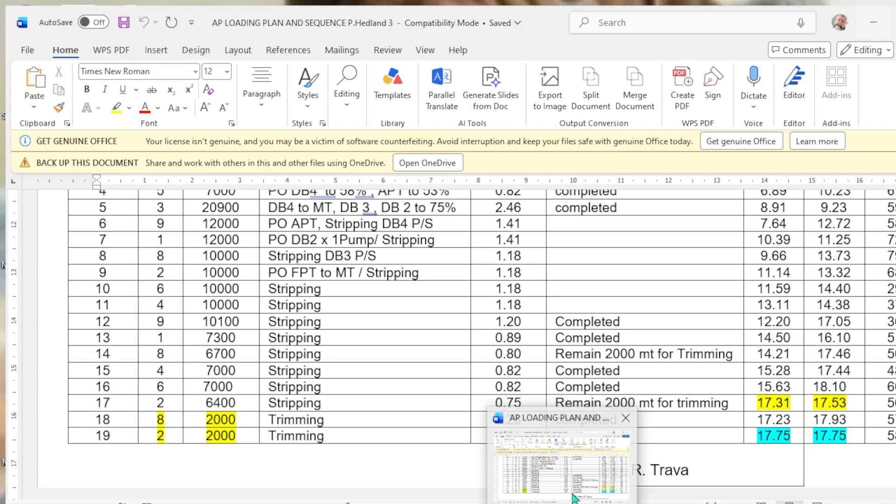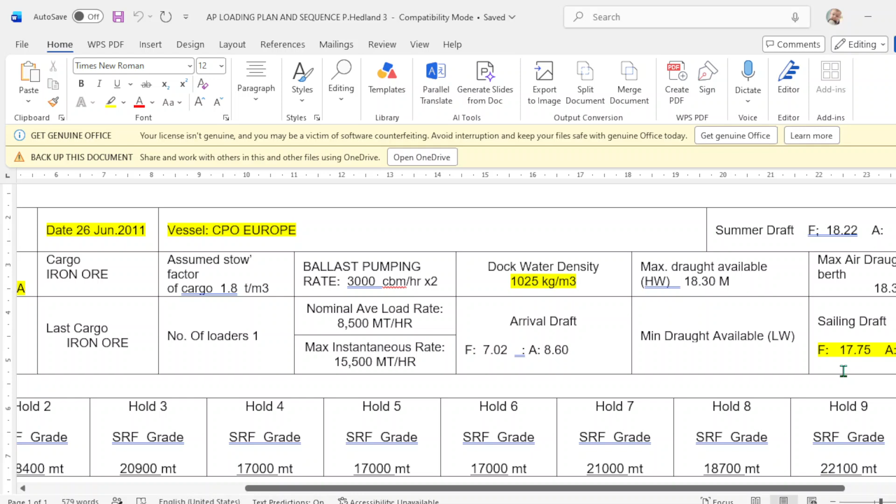This is the loading sequence, and the date the vessel is loading at Port Hedland is 26 June 2011. So that is 15 years ago. Okay, 15 years ago. And the cargo is iron ore and to be discharged in Qingdao, China. The density at berth is 1.025, which is seawater, and the departure draft is 17.75 even keel.

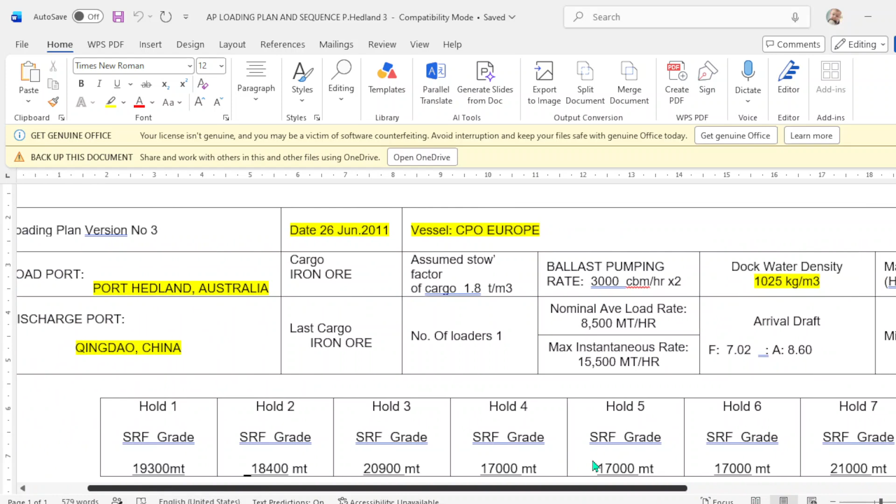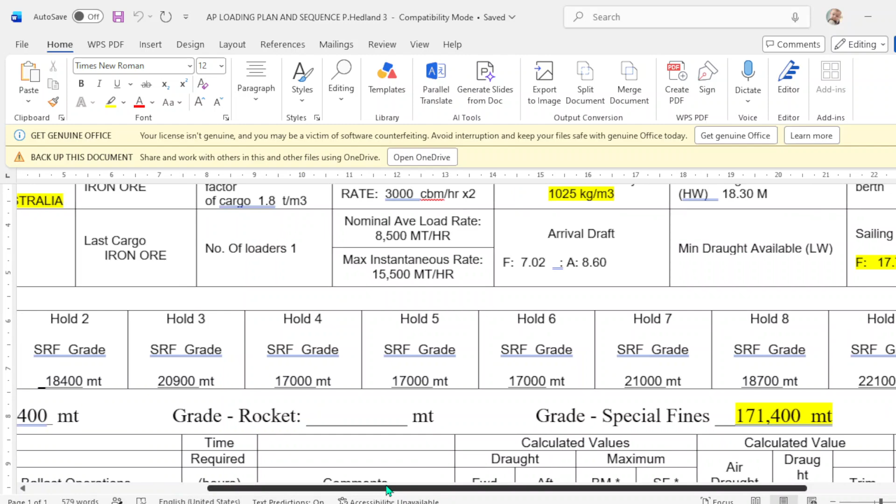Okay, and this is now the cargo for each hold. Number one is 19,300. Number two is 18,400. Number three is 20,900. Four is 17,000. Number five is 17,000. Number six is 17,000. Seven is 21,000, and eight 18,700, and nine is 22,100. Okay, the grade of the iron ore is SRF grade. Okay, SRF grade.

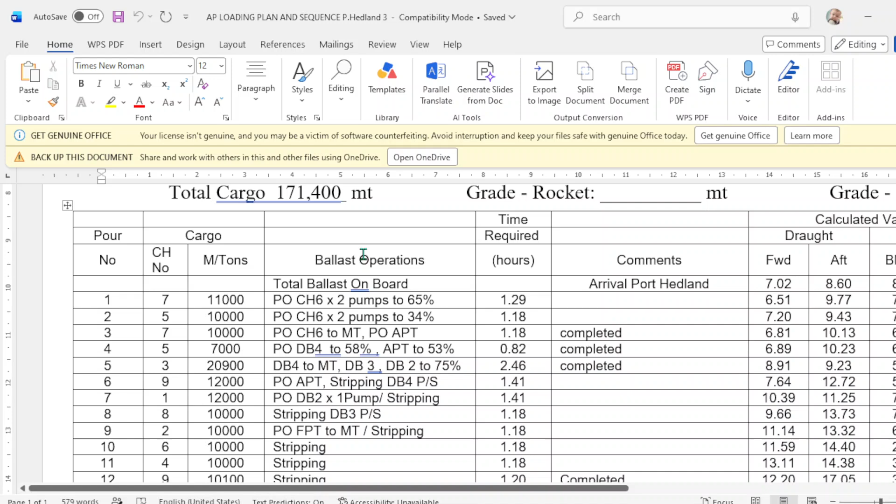And this is now the loading sequence. We have here the number of pour, from pour number 1 to pour number 19. And this is the cargo holds from 1 to 9, and this is the sequence of loading and the cargo for each hold to be loaded. Let's say pour number 1 is hold number 7, then you have to load 11,000. Pour number 2 and hold number 5 is 10,000. And pour number 3 is hold number 7. The second sequence of loading is 10,000, and so forth.

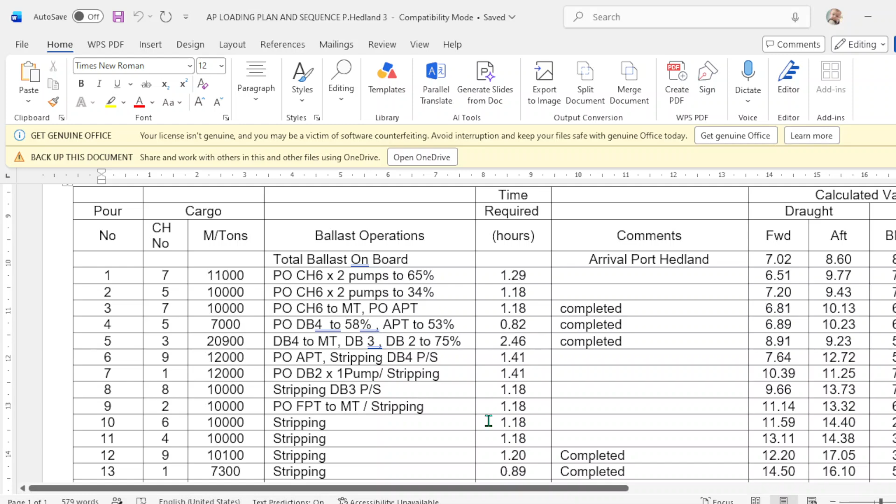This is the ballast operation and number of hours of ballast operation. Okay. Then over here is the draft for each pour. Forward and aft draft, then the bending moment, shearing force, and the air draft. And you have here the mid draft and the air draft for hold number 1, 5, and 9, and trim.

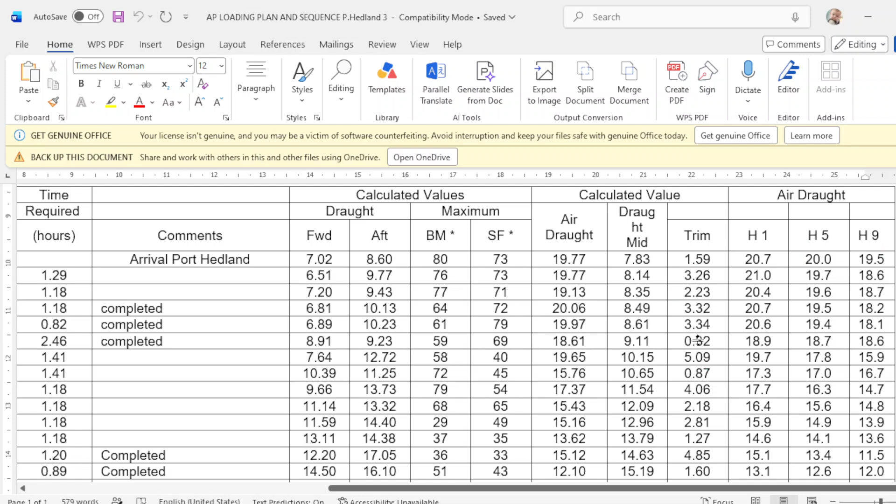Okay, so let's say that the operations are started from pour number 1, and the chief officer, according to his night order or instructions to the duty officers, when reaching pour number 17 in hold number 2, after he has completed loading 6,400, he will advise the foreman to stop loading and ask the draft surveyor and the chief officer to make a draft reading around the vessel to compute for the cargo remaining to load for trimming.

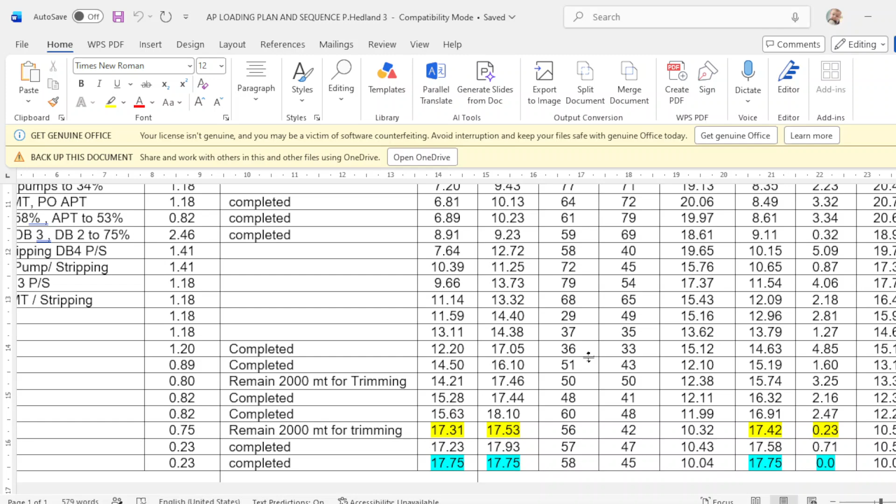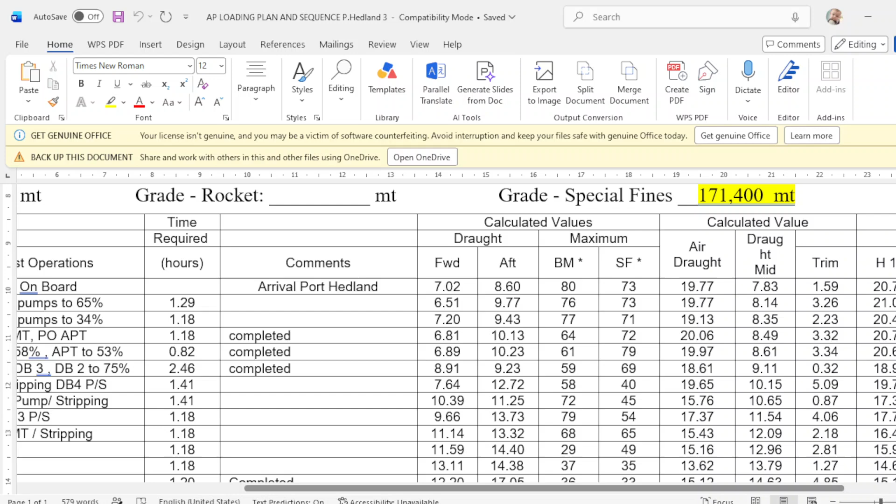Okay, so once the operation has stopped, the chief officer and the draft surveyor would go down the vessel and take a draft reading around the vessel, forward and aft, mid draft, port and starboard. As soon as they have completed reading the draft, they would agree what the draft they have read is. So, for example, they both agreed that the forward draft is 17.31 and the aft draft is 17.53 and the mean draft is 17.42 and the trim is 0.23. So that is now their draft reading.

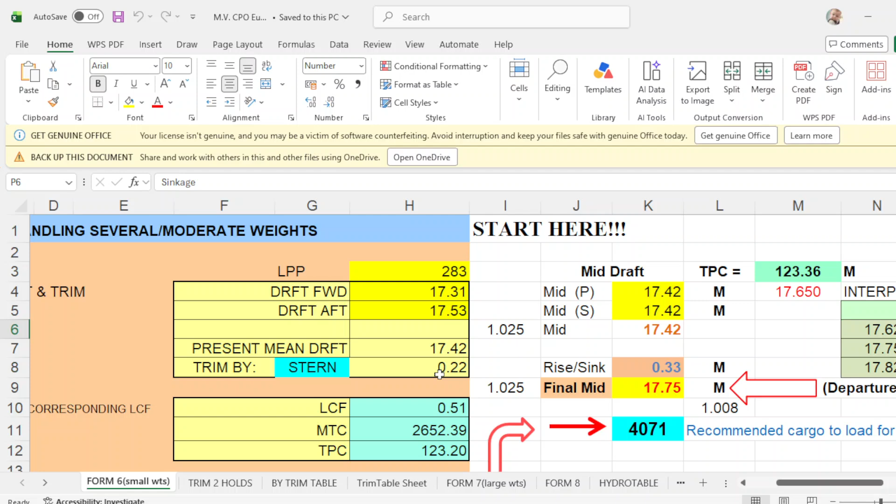Once you have this draft reading, now you can use your program for trimming. So I have here a program for trimming for CPO Europe. And this one, which I call the Form 6 small weights, or how to find trim when handling several moderate weights. So this is the LPP of the vessel, and according to the draft reading of the chief officer and the draft surveyor, draft forward is 17.31. Here, 17.31.

And aft draft is 17.53. Okay, 17.53. Take note that it will automatically compute for the mean draft and the trim. So mean draft is 17.42 and the trim is 23. But the program says 22. Anyway, according to their draft reading, actual mid draft port side is 17.42. And starboard actual mid draft is 17.42. Meaning no list. Okay?

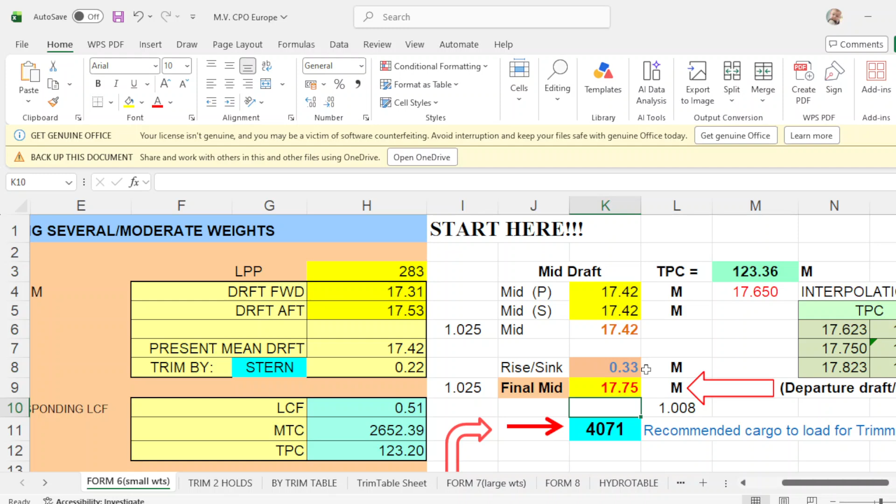And your departure draft even keel is 17.75. Put here 17.75. There you go. Once you put your departure draft, it will compute for the sinkage, which is 0.33 meters or 33 centimeters. So how do you get this one? Your final mid draft is 17.75 minus your mid draft of 17.42. That will be 33 centimeters or 0.33 meters. Okay. There's another way of computing this sinkage.

First, with this sinkage, you convert this to cargo, which is your recommended cargo to load for trimming. So how did I get this amount? You click this cell, then you will see the formula. Okay, formula.

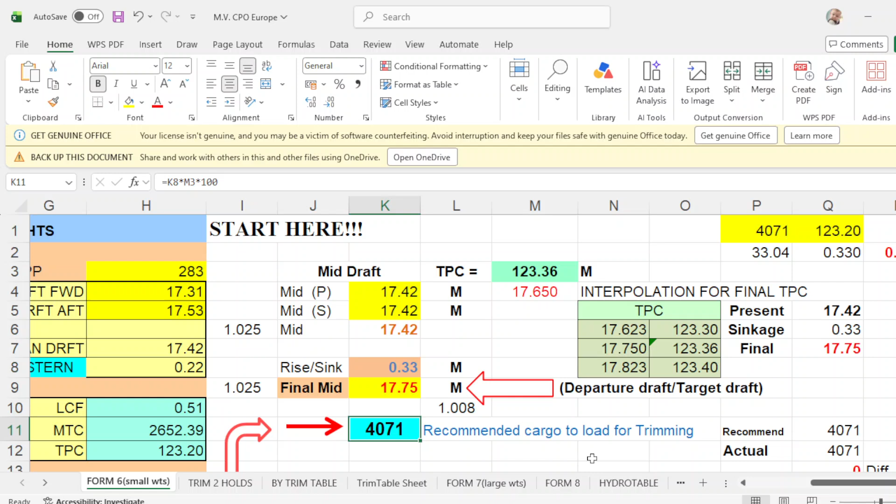So formula says K8, which is K, and row 8, which is your sinkage, times M3, M, row 3, which is your TPC, times 100. Meaning your sinkage times your TPC times 100 is 4071. That is how you will find your recommended cargo for loading. Okay.

Once you already know your departure draft or your final mid draft, you interpolate the TPC of your departure draft of 17.75. So you interpolate the TPC and your TPC would be 123.36, which is this one. Okay? Let's take out this one. Okay? So this will be your interpolated final TPC.

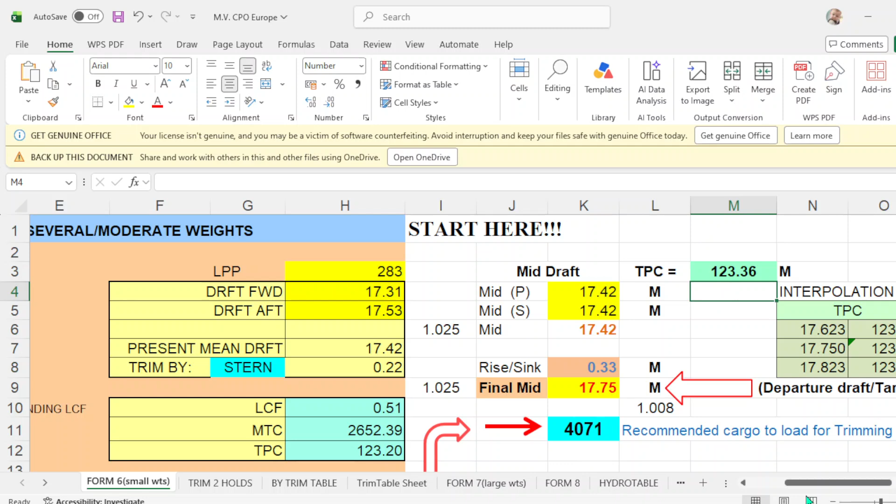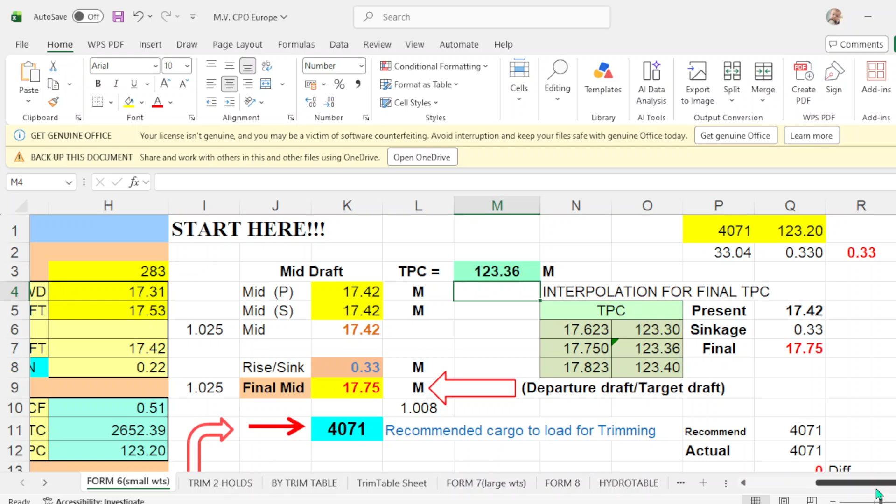Now, there's another way of computing the sinkage. Your recommended cargo total for trimming is 4071. Just place it here. Then you have your TPC from your initial draft forward and aft. So your TPC is 123.20, which is this one. So your recommended cargo total for trimming divided by your TPC 123.20, that will be 33.04. Divide by 100, that will be sinkage will be 0.33.

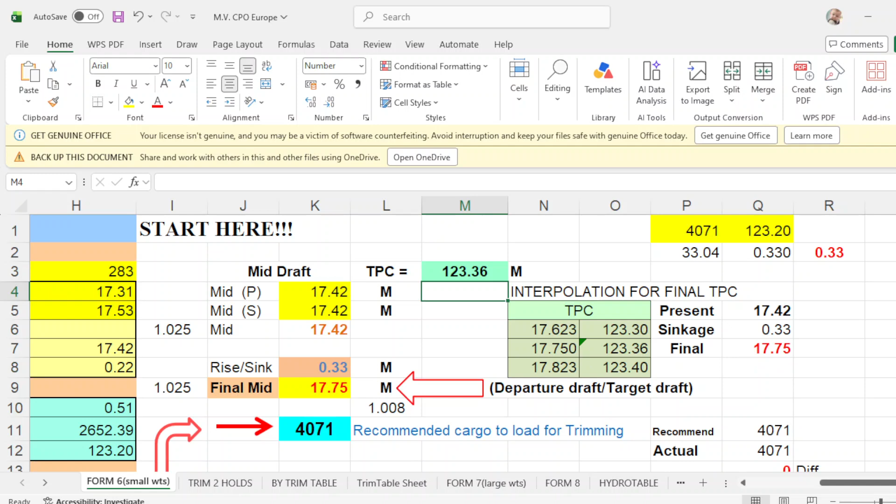So your present draft, mid draft of 17.42 plus your sinkage of 0.33, your final departure draft is 17.75, which is exactly the same with this one. Okay? There's another way of finding the sinkage. That will be weight divided by TPC divided by 100, then you will have 0.33 meters of your sinkage. Okay.

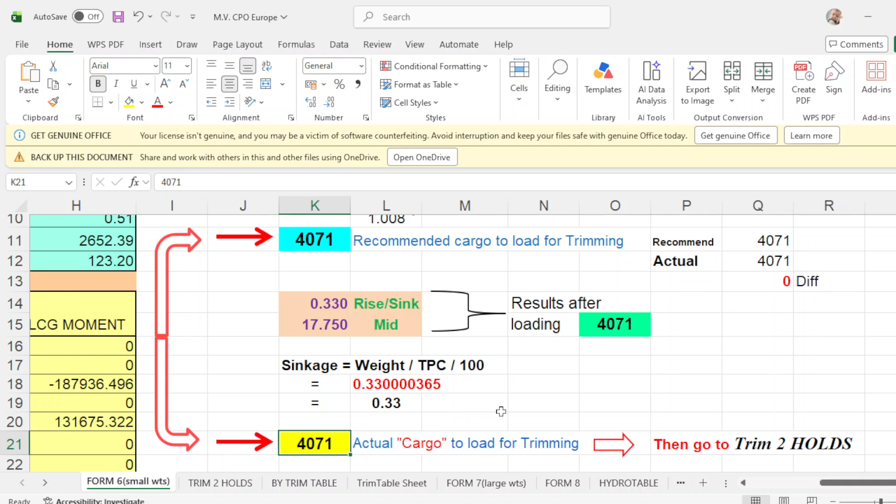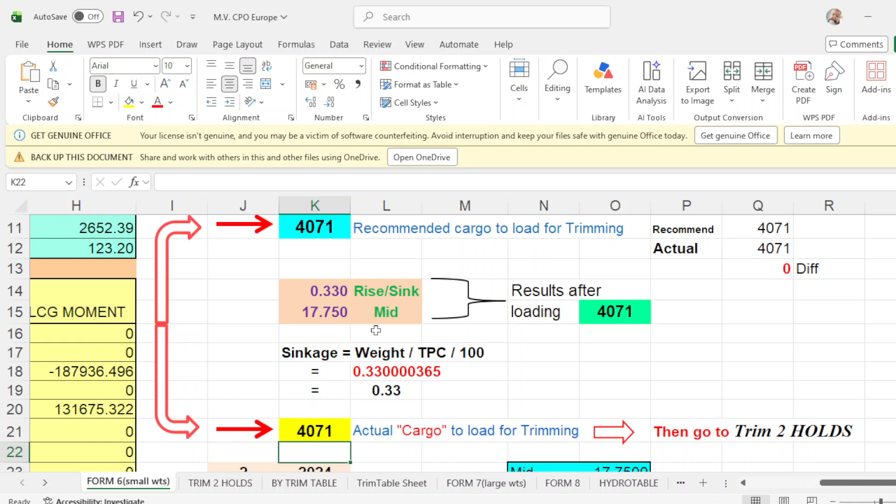Now, you have already your recommended cargo to load for trimming. So you follow this arrow, then put here your remaining cargo to load for trimming. So put here 4071. Once you loaded 4071, results after loading, then your mid draft will be 17.75, which is exactly the same with your departure draft, and your sinkage is also the same with this sinkage. So this is to prove that your figure is right.

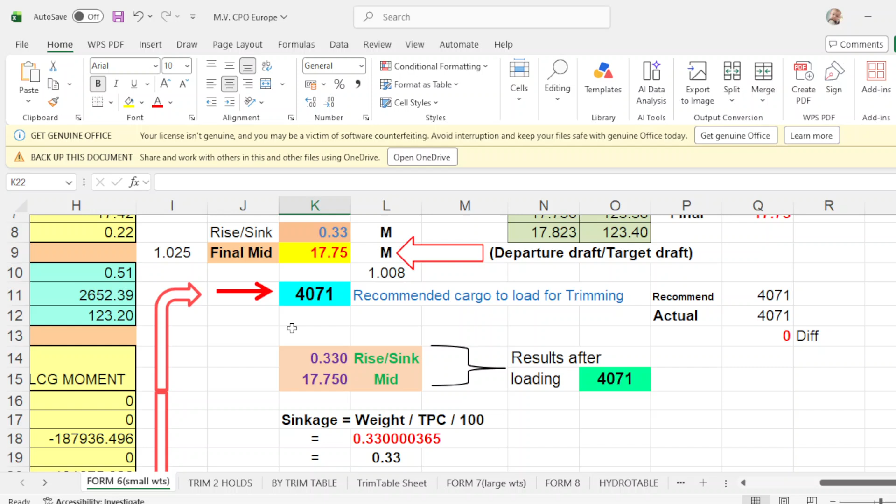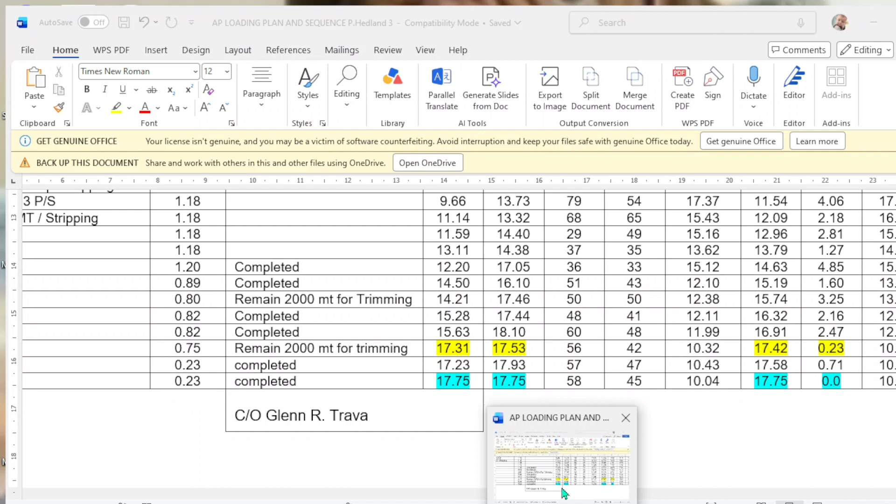Now, it says here, this is the actual cargo to load for trimming, then it says go to trim 2 holds. So you go to trim 2 holds. It says here trimming with 2 holds, and take note of the remaining cargo to load is 4071. Your trimming holds are 8 and 2 according to your plan. And your initial draft forward is 17.31, aft draft is 17.53, mean draft is 17.42, your trim is 22. This is your MTC, LCF, and TPC.

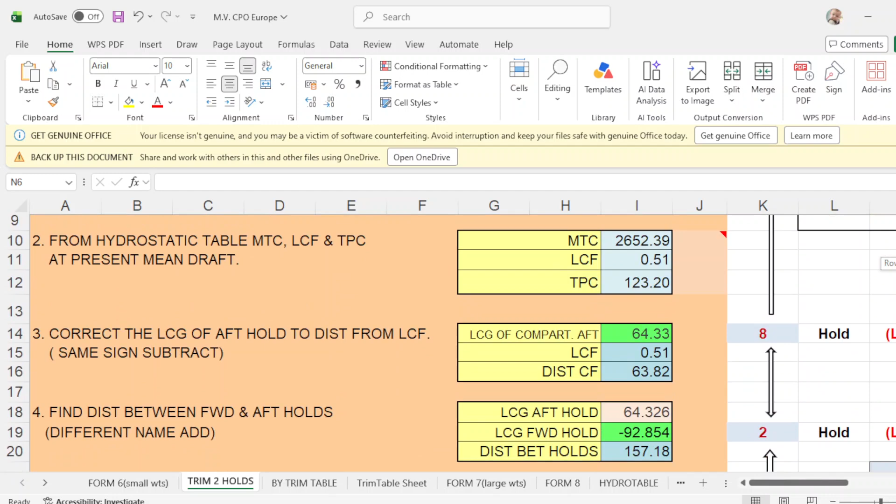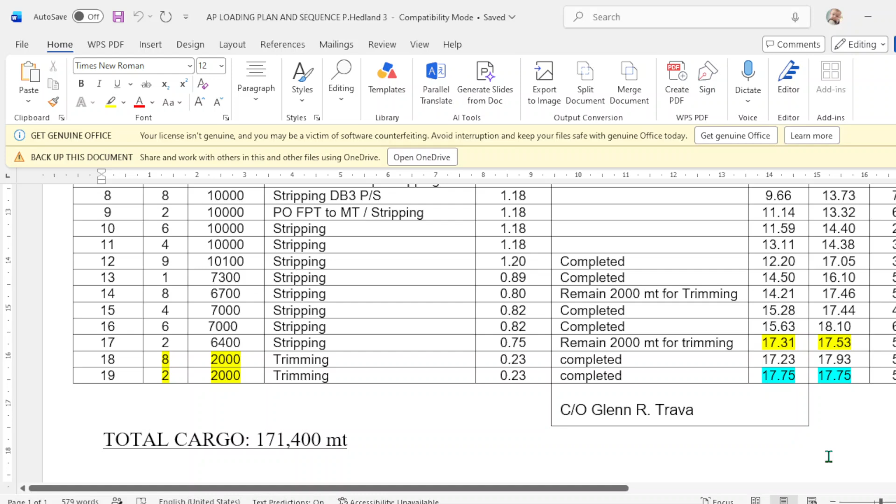Okay? So you now scroll down and take note, it is asking for your final trim. Since according to your plan the vessel is even keel, your trim is 0. Here, your trim should be 0. So put here 0, the final trim, because of even keel. Then it will tell you what to load in cargo holds 8 and 2.

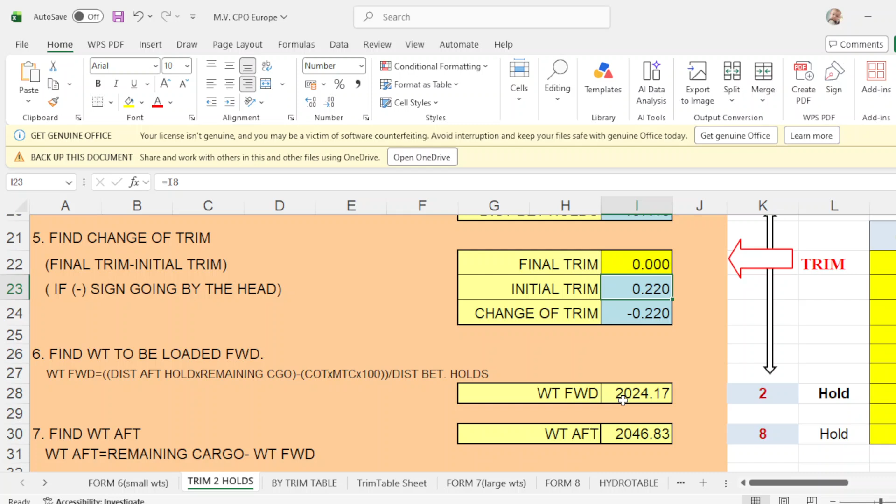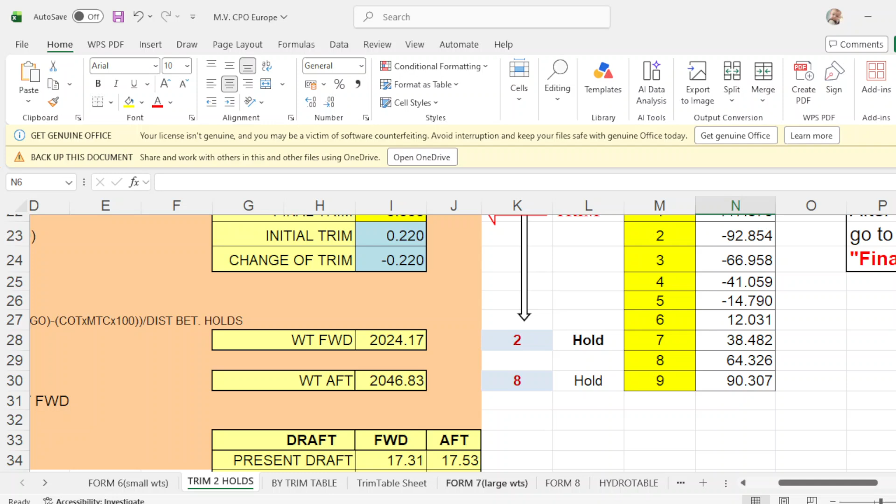So in cargo hold number 2, for your forward hold, you have to load 2024. So in number 2, you write 2024. And number 8 should be 2047. And you have here 2047 if you run it up, and it will give you the final departure of even keel. Forward is 17.75, aft draft is 17.75, your trim is 0, and your mean draft is 17.75.

Your deflection is 0. So your mid draft, how do you get your mid draft? So this equals, go to form number 6. This is your mid draft. Click this one, press enter. That will be your mid draft, put equals here, and this is your mid draft, and your deflection is 0. Okay, so this is program number 1, program number 2, and program number 3 by trim table.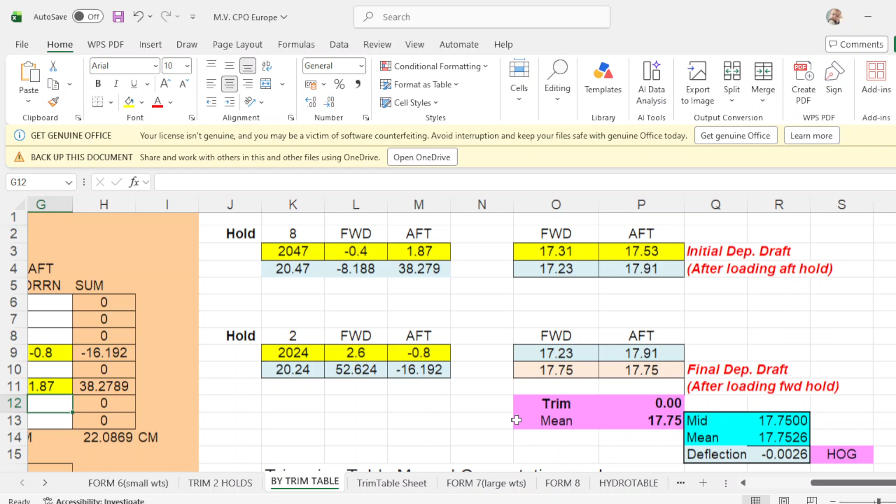Trim table, take note of the remaining cargo to load is 4071, and your initial draft forward is 17.31, aft draft is 17.53, your mean draft is 17.42, your mid is 17.42, and your trim is 0.22. Okay, so your trimming holds are 2 and 8, and your cargo to load in hold number 2 is 2024, and 8 is 2047. Consult your loading manual and look for the forward and aft correction of hold number 2, and hold number 8.

So I have here a table sheet for trim correction. So this is the name of the vessel, this is the name of the cargo hold, this is the draft 2, 4, 6, 8, 10, 12, 14, 16, 18, and 20. This is the forward correction and aft correction. Since our departure draft is 17.75, the nearest draft would be 18. So I click here 18. Our trimming hold is hold number 8, forward and aft. So I made highlight here.

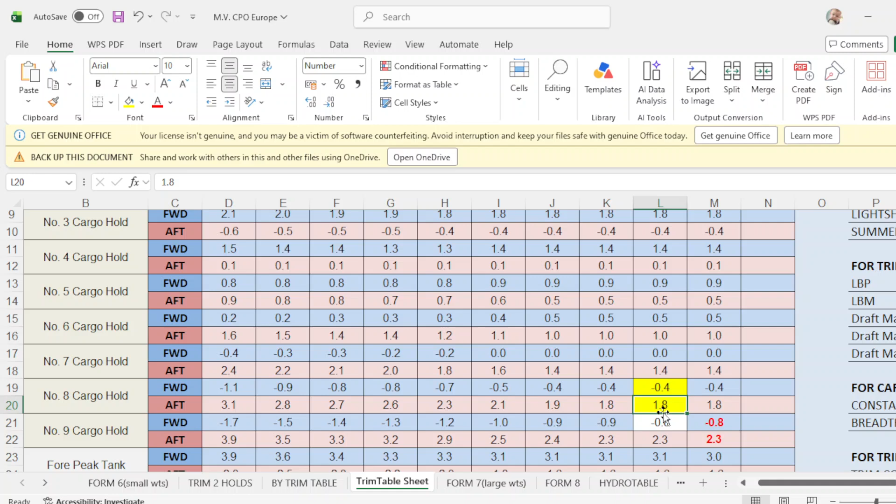So forward is negative 0.4, negative 0.4. There you are, and aft draft is how much? Aft draft is positive 1.8. Positive 1.8.

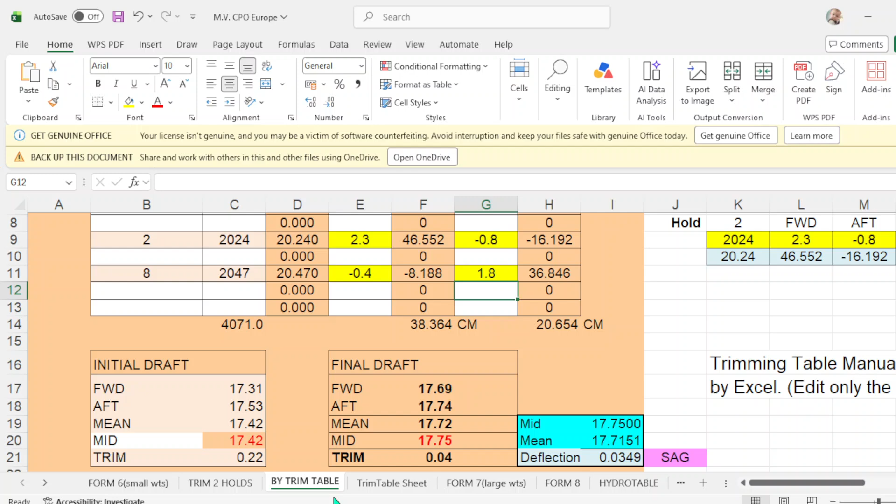Okay. Take note of your departure draft. So forward is 17.69, aft draft is 17.74. Short from your departure draft of 17.75. Okay. Now take note that in hold number 2, in forward correction from draft 10 meters up to 20 meters, they have the same figure correction of 2.3. So these are all assumptions. So they cannot pinpoint which point somewhere in the vessel would give the precise number of correction at a certain point.

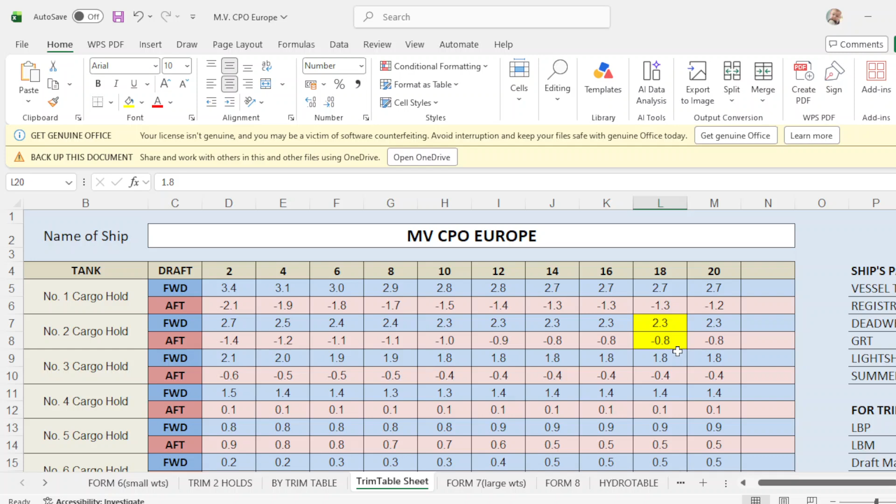So with your aft correction, and the same thing with hold number 8. So these are all assumptions. So what we do, since your draft is less than your departure draft of 17.75, we will adjust the forward correction. See, forward correction, we will adjust. So make this 2.4, okay, increase the number to 2.4, then it is now 17.71, but it's still short, so make this 2.5, increasing a little more, 2.6. Now you have 17.75.

Now you have to adjust your aft draft, but take note of your trim by the head, so you have to adjust your aft. So make this 1.9, for example. Too much, so you have to reduce. What will be this, 1.89? So 85. Now even keel, okay? So this is a little bigger, we make this 1.88 of your deflection. Deflection, your mean draft.

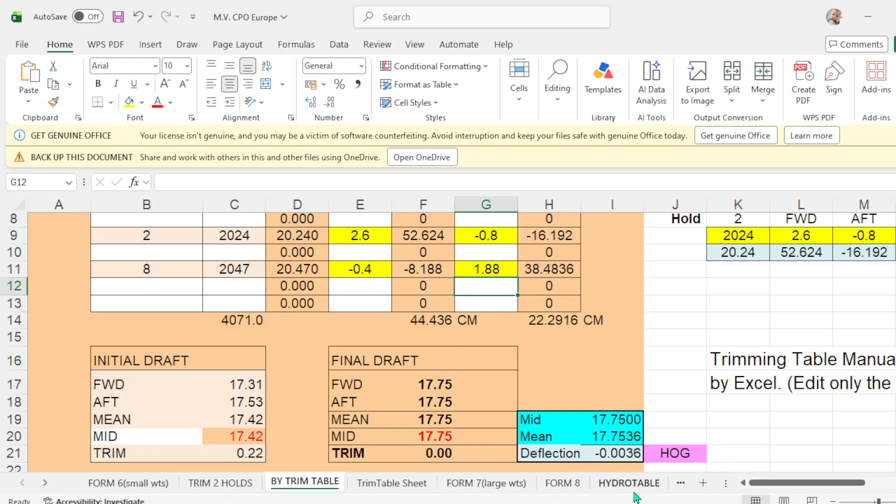So to reduce the deflection, make it 8. Now it's 36. I think that's okay. So you are now even keel at 17.75 forward, aft, mean, and mid. So your trim is 0 and your deflection is 0. Okay. Now we go here.

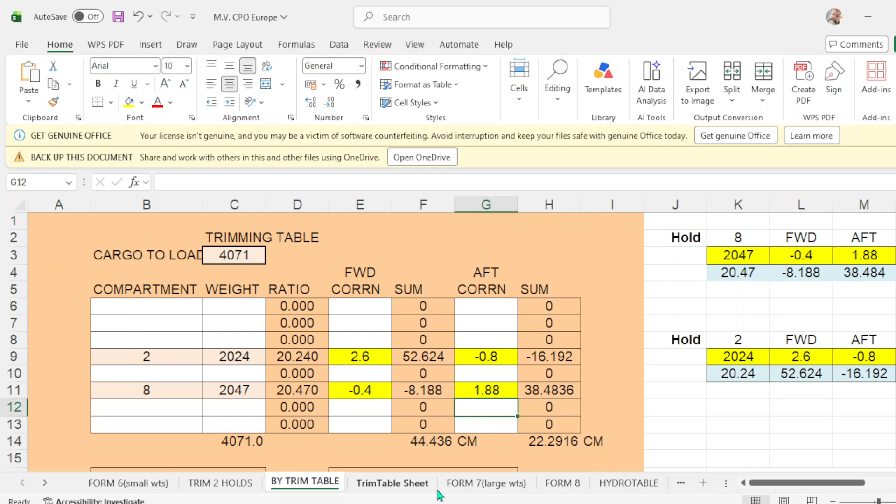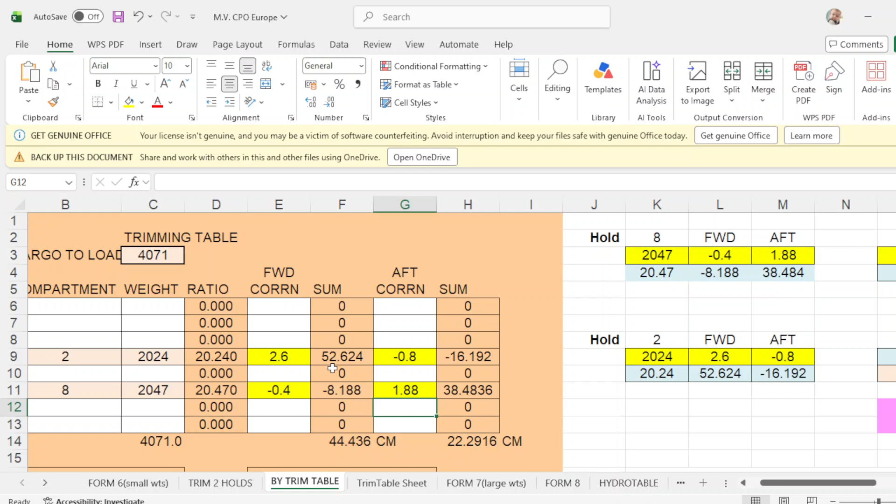If we try to load in hold number 2 the 2024 first, then we will be trimmed by the head, which is not good for stripping. So I suggest that we must load first in hold number 8 to have a good trim by the stern. Take note, number 8, the weight is 2047, forward correction is negative 0.4, and aft correction is 1.88. In hold number 2, the weight is 2024, the forward correction is 2.6, and aft correction is negative 0.8. Okay? And this is the initial draft of forward 17.31, aft is 17.53.

So after loading 2047 in hold number 8, your new draft will be 17.23 forward, and aft will be 17.91. So carry this down, then now you have to load in hold number 2. Hold number 2, you load 2024. After loading 2024, your draft will be forward 17.75, aft draft 17.75, and your deflection is 0. Your trim is 0 and your mean draft is 17.75.

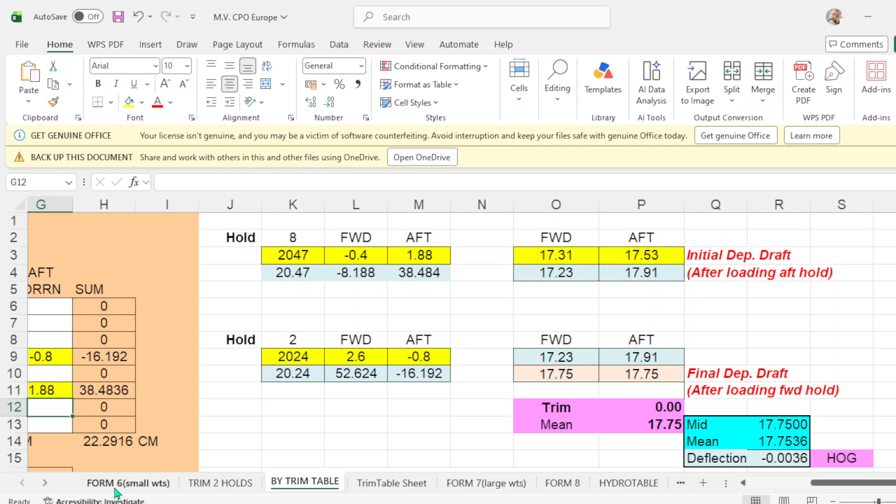So you have 3 programs now, which are by trim table, trim 2 holds, and form number 6. And the last program to back you up is form number 7. So form number 7 is how to find draft and trim when handling weights involving large changes in draft. Okay? Take note the density at berth is 1.025. So density is 1.025 and the draft forward is 17.31, and aft draft is 17.53, and your mean draft is 17.42 and your trim is 0.22.

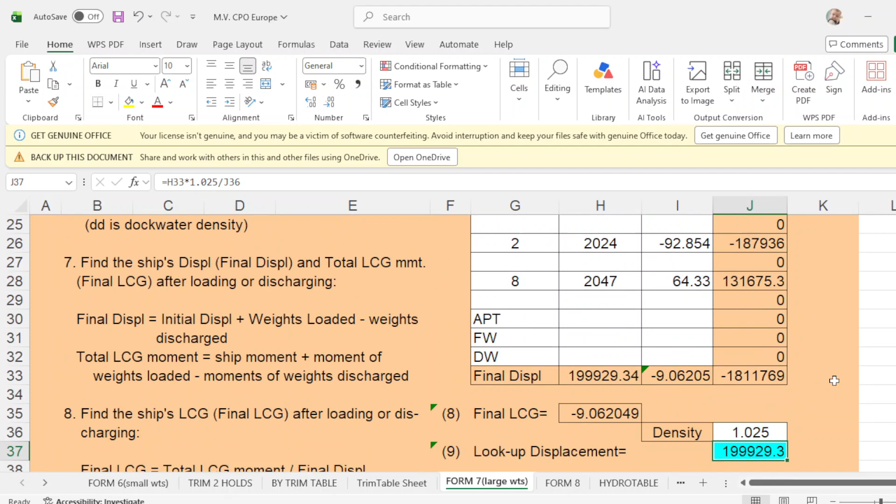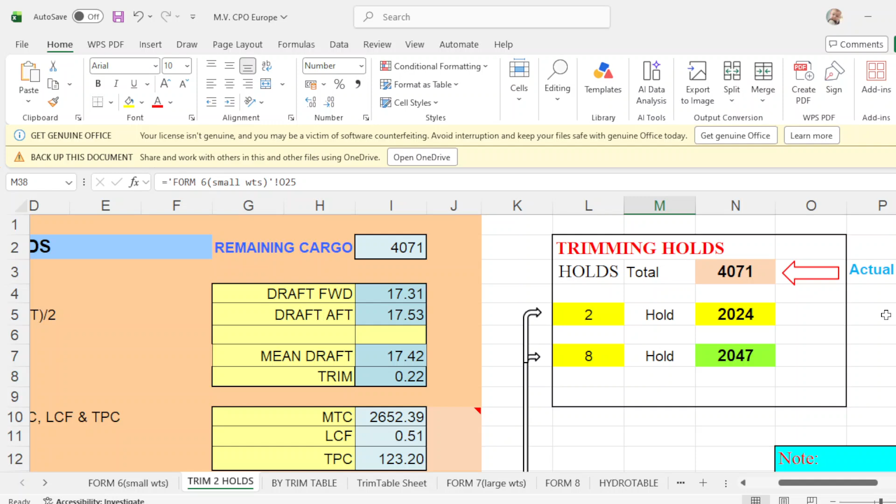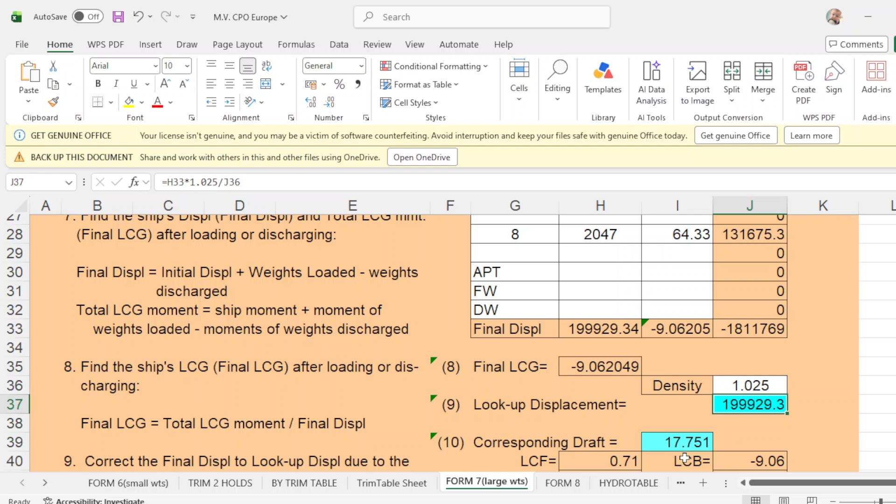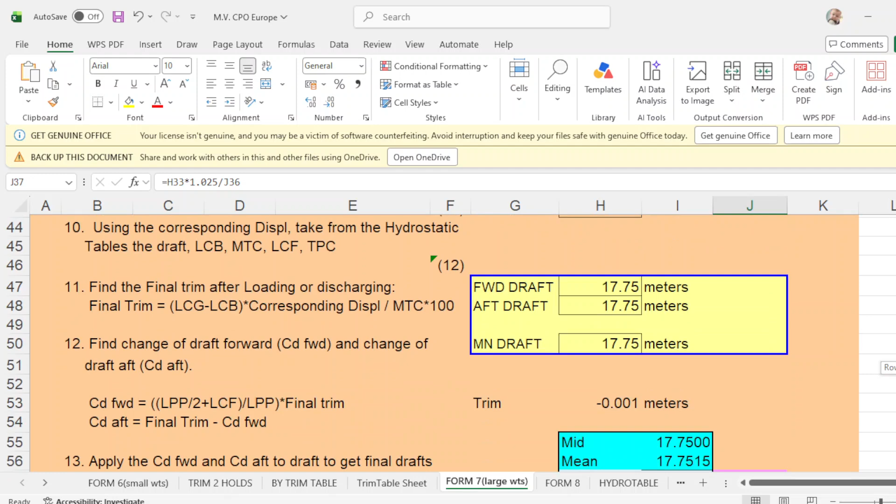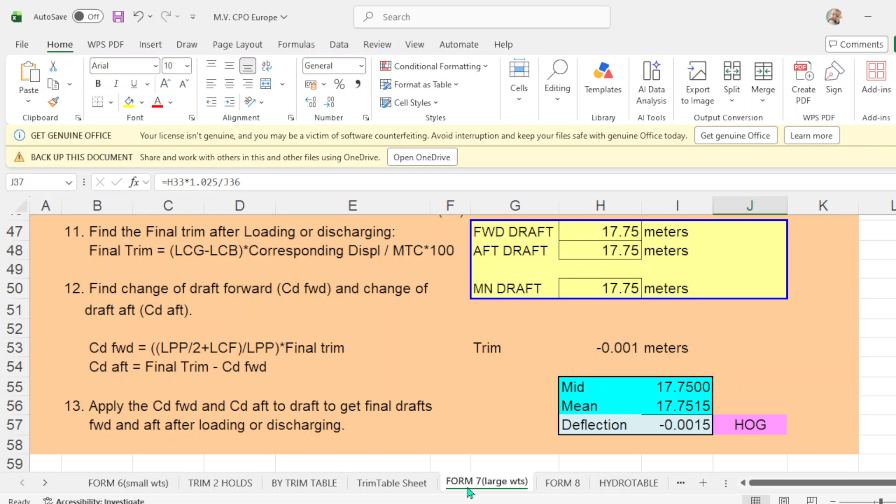And your density at berth until completion is 1.025. And your mean draft is 17.75. And your departure draft forward is 17.75, aft draft is 17.75, mean draft is 17.75. It's even keel. So you have 0 trim and your deflection is 0. So you have 1, 2, 3, 4 programs to back you up. That will be form number 7, or how to find draft and trim when handling weights involving large changes in draft.

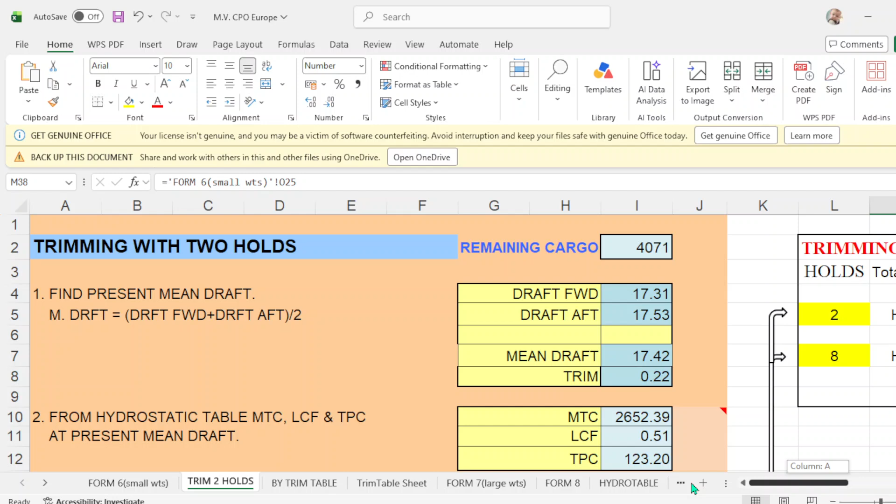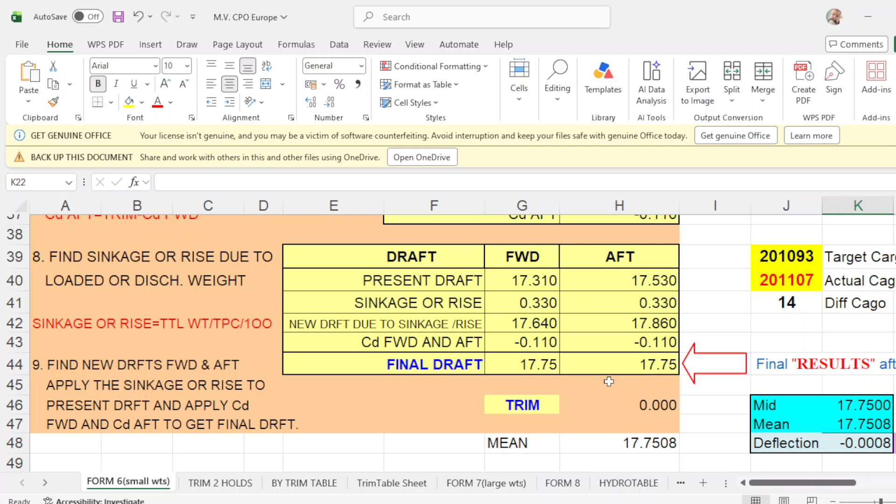Then you have by trim table. Okay. Trimming table, and you have an even keel draft here, and trimming 2 holds, then your quarter draft is even keel. And finally your form number 6 is how to find trim when handling several small weights. So your departure draft is even keel, forward 17.75, aft draft 17.75, 0 trim, and mean draft 17.75. Okay, this is with your vessel.

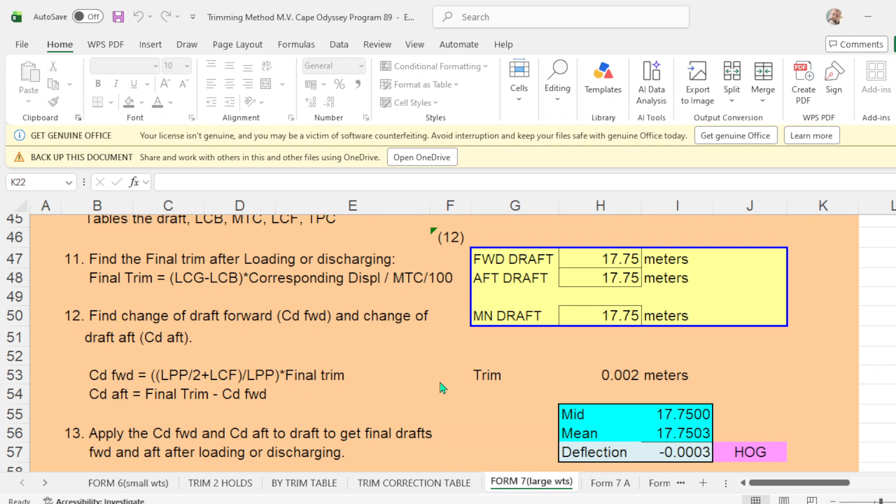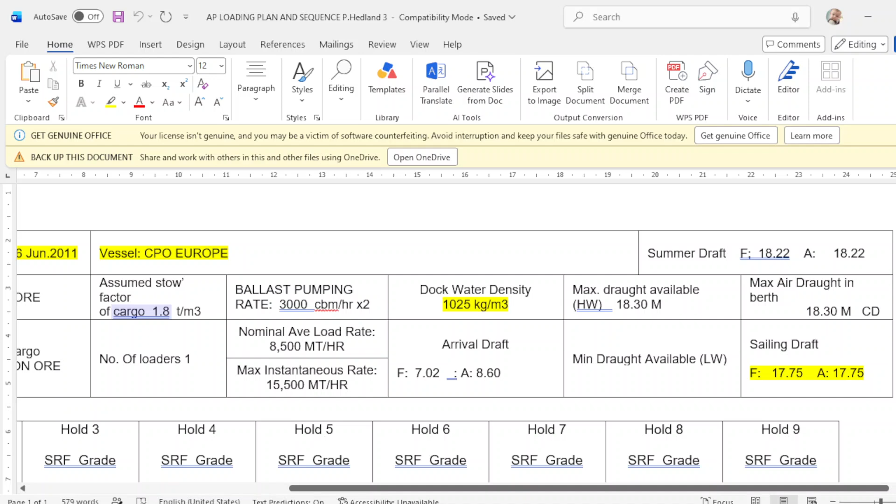CPO Europe. Now, I will try to use another vessel, which is the Cape Odyssey. This is Cape Odyssey. Let me see. The name of the vessel is Cape Odyssey. Okay. This is also a capesize vessel of 9 holds. For example, he is also going to load at Port Hedland. Okay. And the same sailing draft of even keel 17.75 meters. 17.75 meters even keel. Okay?

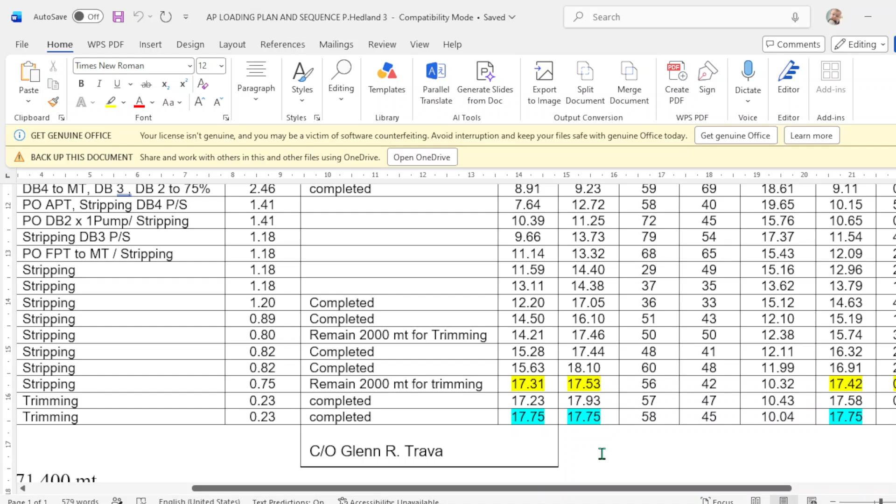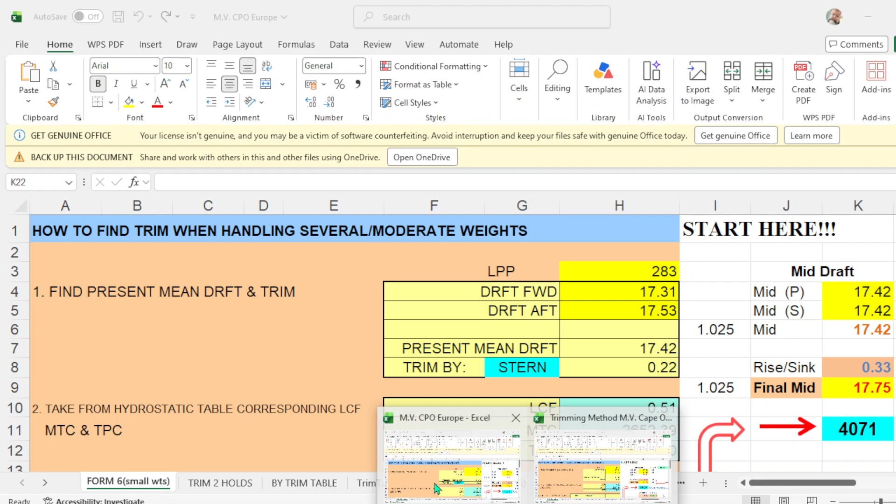And we'll just use the same figures of the initial draft. So go here. That will be this one. So the initial draft forward and aft is 17.31, 17.53. Okay. Take note, the mid draft is 17.42, trim is 0.22, and the final actual draft mid port is 17.42, for example, and starboard mid draft is 17.42. No list. Okay. And the final departure draft is 17.75. Okay. So your sinkage is 33.

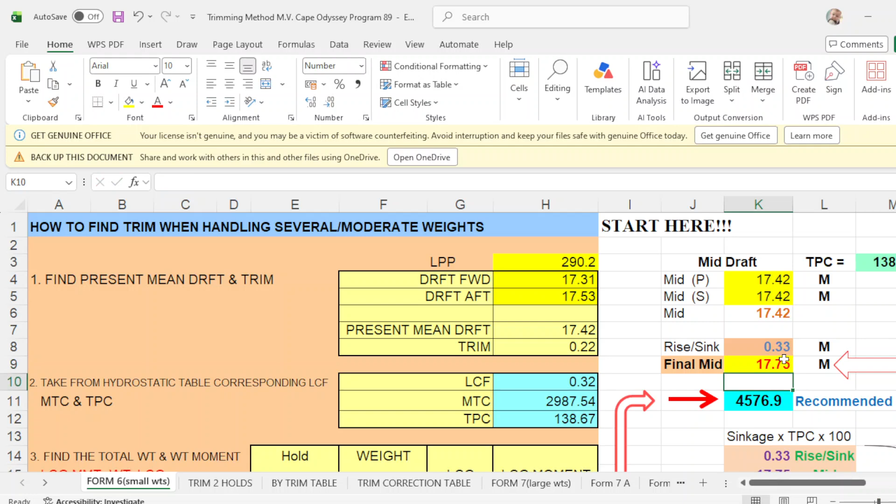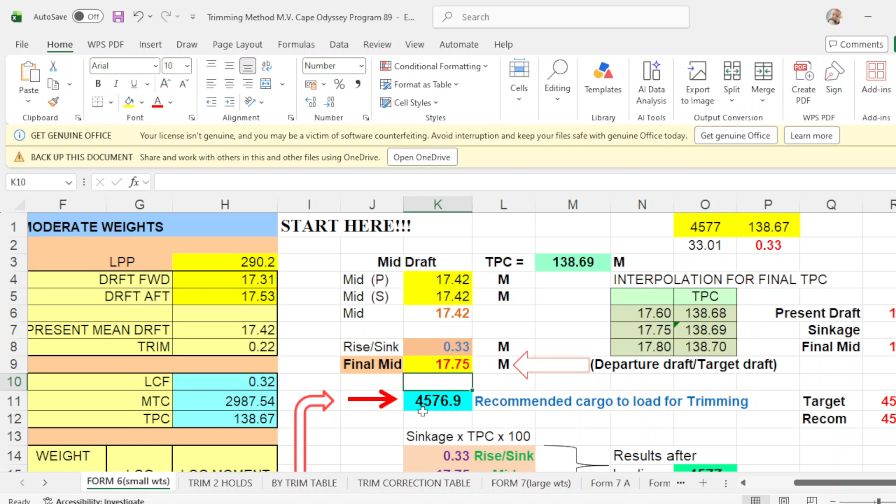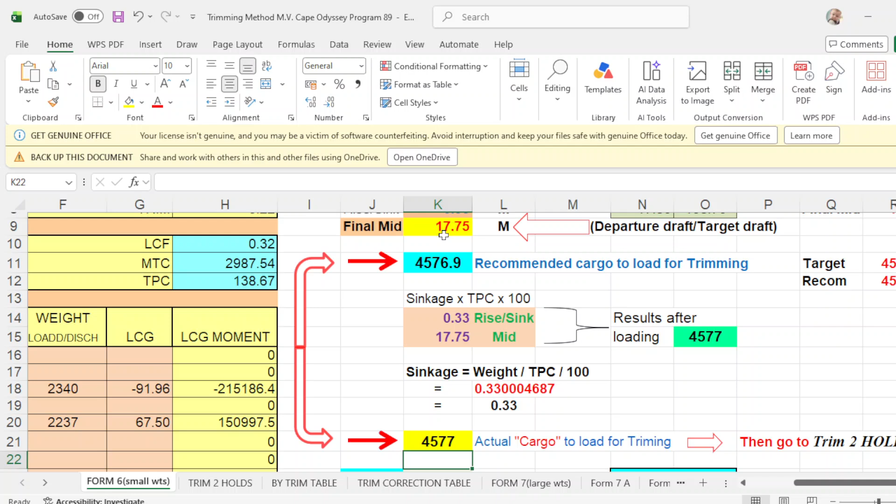So again, sinkage times TPC times 100, that would be 4576.9, the recommended cargo for trimming. Okay, you scroll down, go to the arrow, then you put 4577 to round it up. 4577. Once you loaded 4577, then your mid draft, departure draft will be 1775, which is exactly the same. And your sinkage will be 0.33, which is exactly the same.

The other way of finding the sinkage is your recommended cargo to load for trimming is 4577, and your initial TPC from your initial draft is 13867. This one, 4577 divided by 13867, that would be 33.01 times 100. Your sinkage will be 0.33. So your present draft of 1742, which is your mid draft, plus your sinkage of 33, then your final mid departure draft is 1775, which is the same with this one. So the difference from target to recommended is 0.01, which is nothing.

Okay, so once you loaded 4577, which is the actual cargo to load for trimming, then go to trim holds 2. You go to trim holds 2, which is trimming with 2 holds. Take note of the remaining cargo to load of 4577, and your trimming holds are 2 and 8. Take note of the initial draft. Forward is 1731, aft draft is 1753. Your mid draft is 1742, trim is 022. Your MTC, LCF, and TPC.

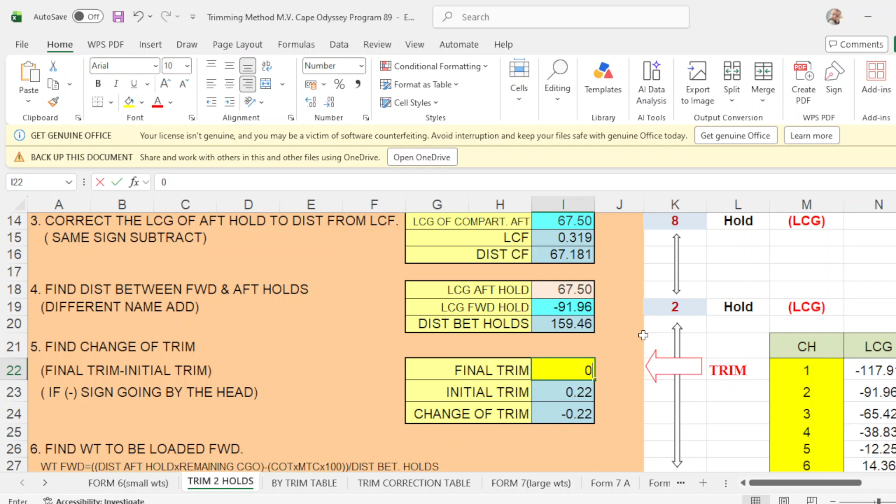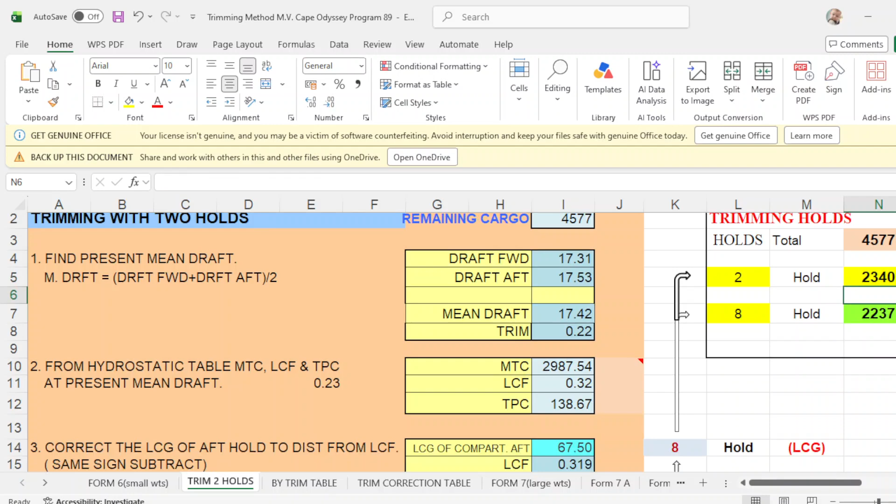Okay? So, it will ask you what will be your final trim, and our final trim says no trim, so 0. So, his recommended cargo to load in hold number 2 is 234, let's say 2340. So, you put here 2340, and hold number 8 will be 2237. 2237, if you run it up, and your departure draft will be forward 1775, aft draft 1775. Zero trim, mean draft is 1775. Your deflection is 0. Okay? You can adjust this one to make it okay.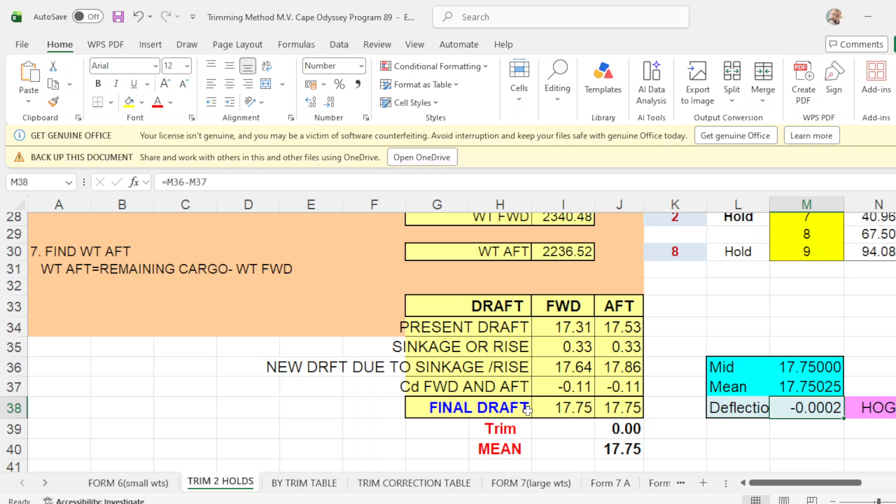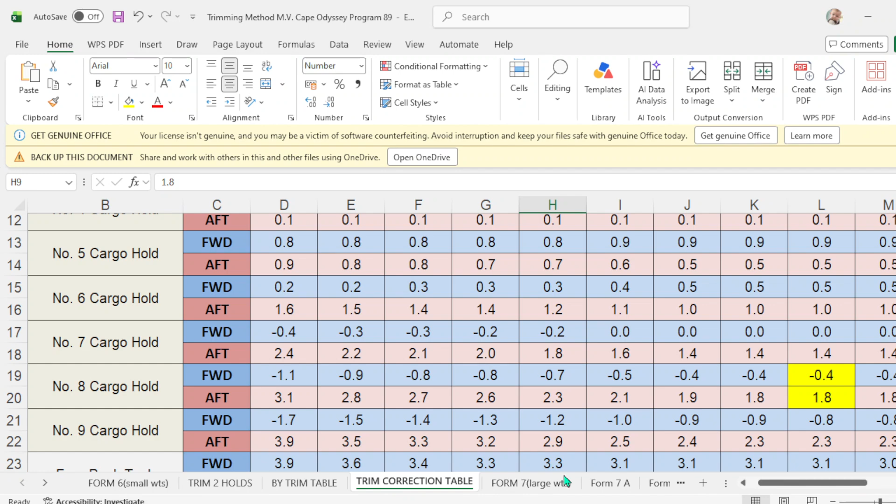Then by trim table, okay. So take note of the trimming cargo is 4577. Your trimming holds are 2 and 8. Your cargo number 2 is 2340. Okay, and number 8 is 2237. And let's check the trim table correction. Number 2 is 2.3 forward, and aft correction is how much? Negative 0.8. And number 8, scroll down. Number 8 forward is negative 0.4, and aft correction is how much? 1.8. And what will be your departure draft?

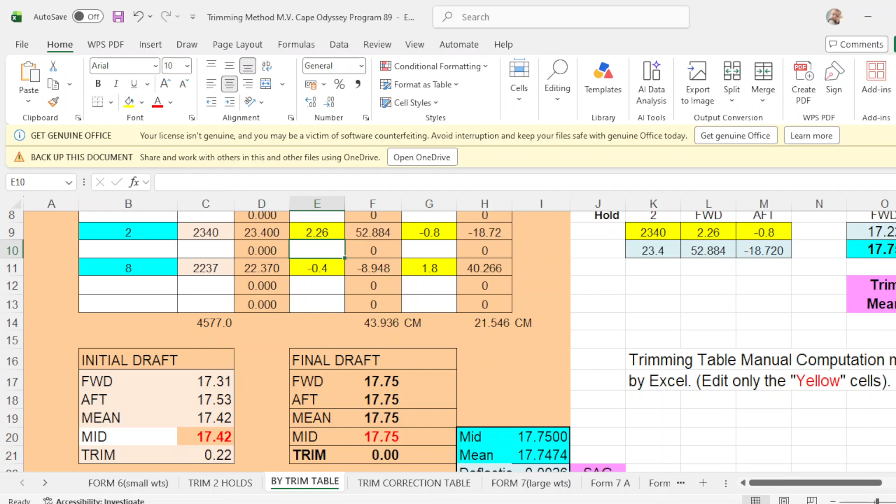So you are trimmed by the head. So you adjust your forward correction. You make this 2.9. You are trimmed by the head. Adjust this one again. Reduce this one to 8. Still, you are trimmed by the head. Reduce 7. Still, trimmed by the head, to 6. Now, even keel. Okay? You are now even keel. Forward, aft, mid is 75, 0 trim. Your deflection is 0. Okay?

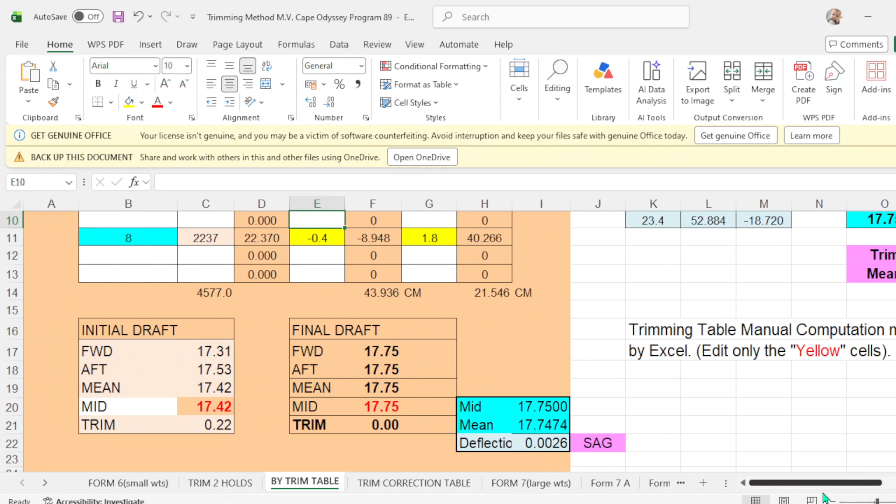Then over here, in number 8, cargo is 2237. Forward correction is negative 0.4. Aft correction is 1.8. Hold number 2 is 2340. Correction is 2.26. Aft correction is negative 0.8. Then your final draft, forward and aft, is 1775. Your trim is 0. Your mean draft is 1775. Your deflection is 0. So this is your third program, and the last program is form number 7, which is how to find draft and trim in handling involving large changes in your draft.

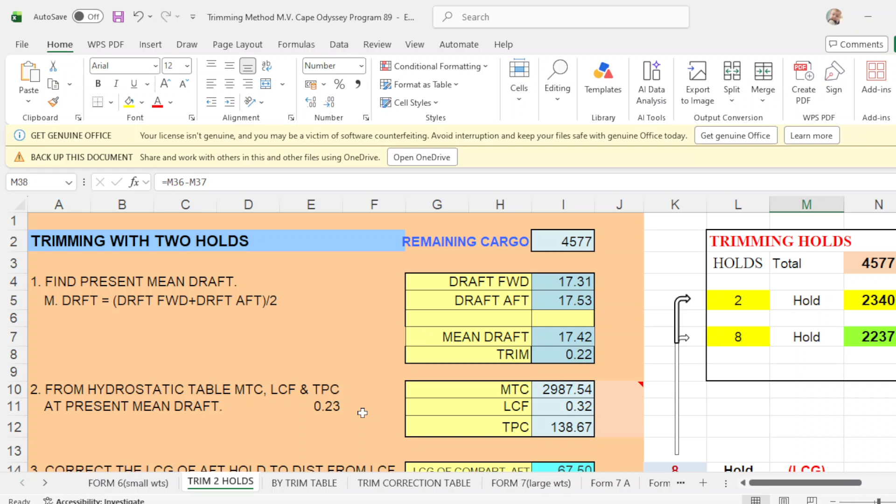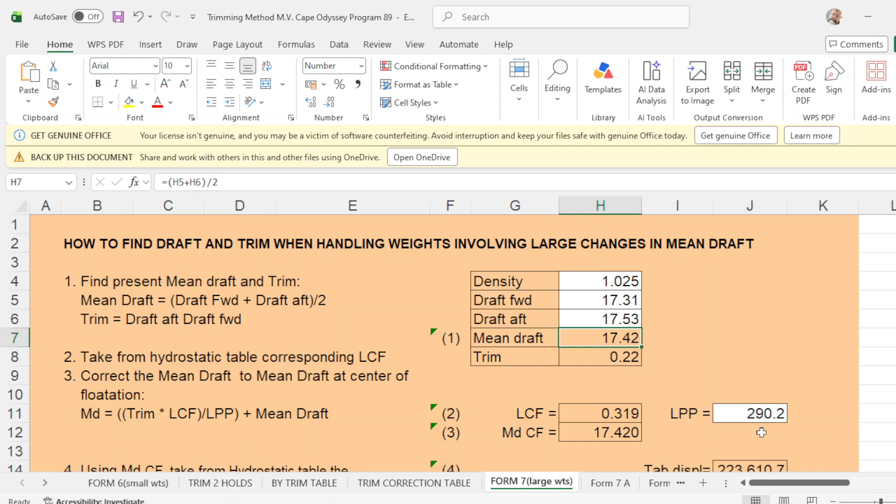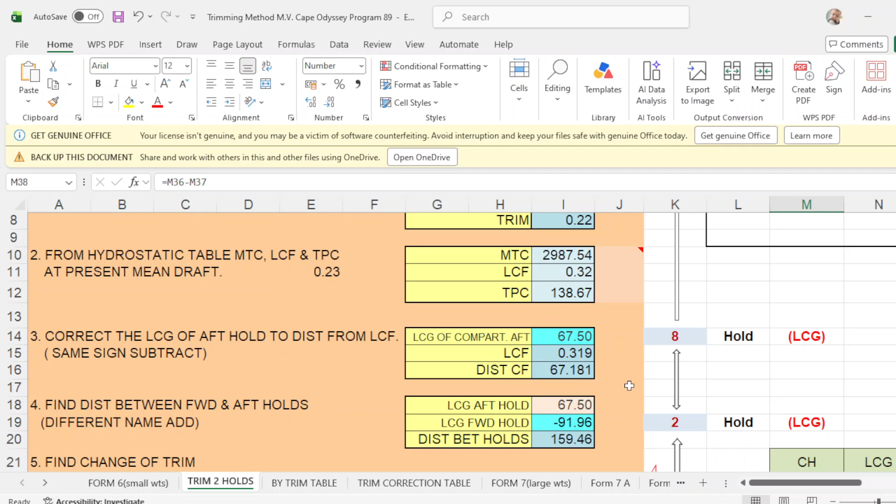So your density at berth, at loading berth, is 1.025. Initial draft is 1731, 1753. Okay, so your mean draft is 1742, trim is 22, and LPP is 290.2. Okay, then how much are you trimming out of 2 and 8? Number 2, you should load how much? 2340. And number 8 is how much? 2237. Apply your LCG,

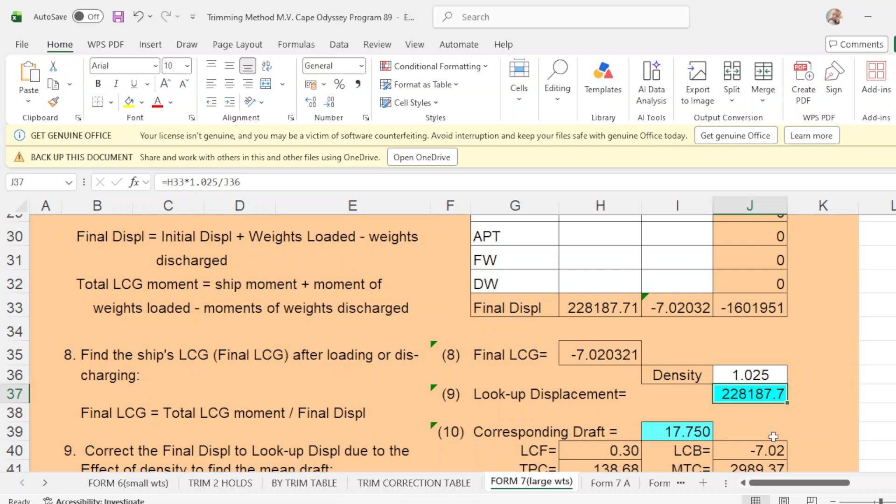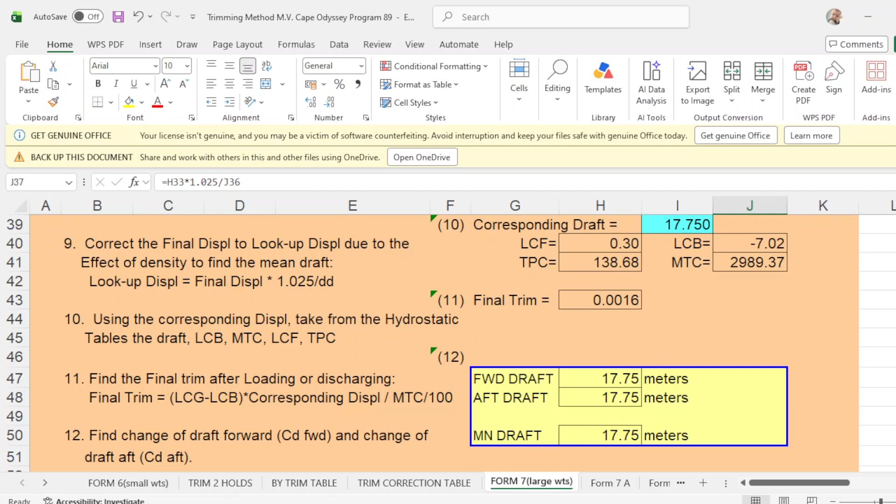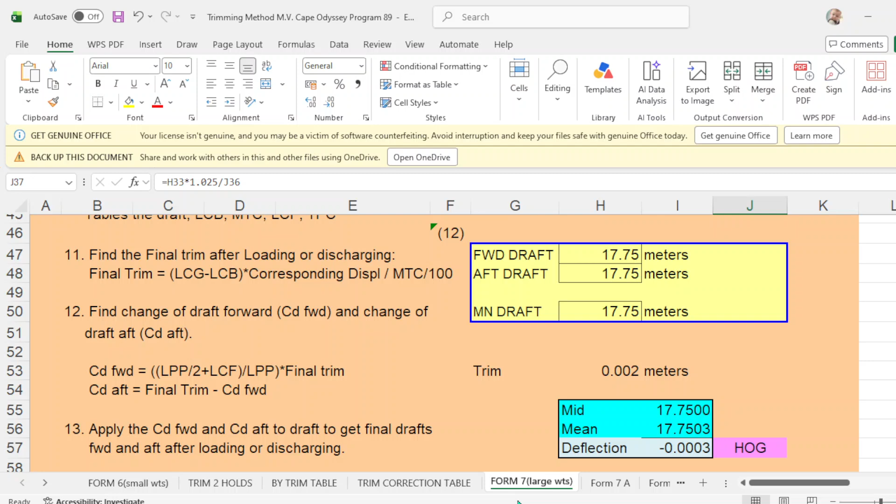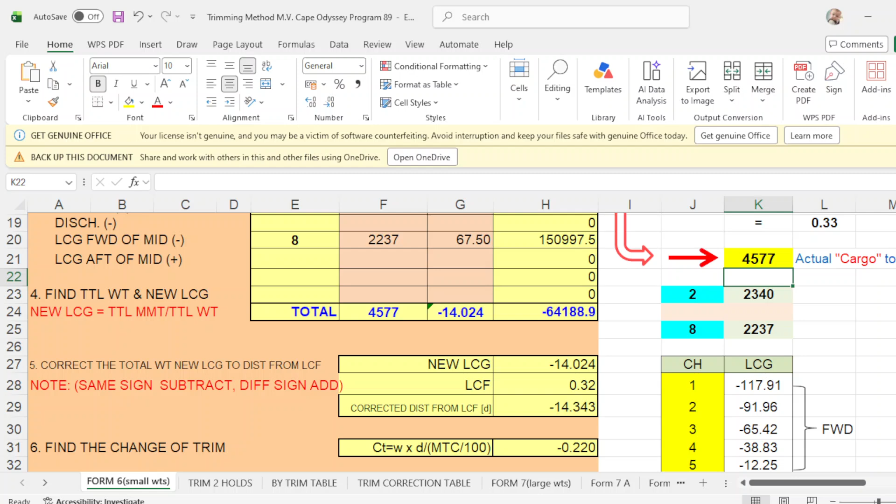and your density at completion is still 1.025, and your departure mean draft is 17.75. Your forward draft is 17.75, aft draft is 17.75. Your mean draft is 17.75. Your trim is 0. Your deflection is 0. So you have 4 programs to back you up. Form number 7, trim table, even keel. Trim 2 holds, even keel, and your form number 6, which is also even keel.

Okay, so that's it, guys. You have four programs to back you up in computing the remaining cargo to load. So this is a very good program. This will give you more confidence in your actual loading at berth.